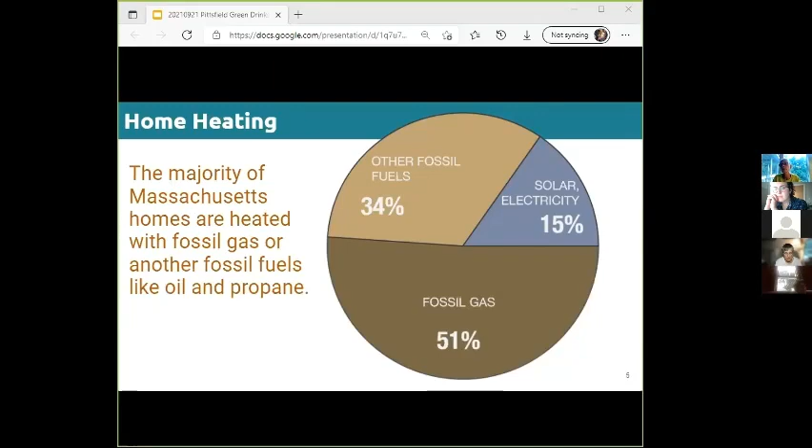But when we look at heating our buildings, we can see that over 80% of our buildings are heated with fossil gas or some other fossil fuel like oil and propane. Electricity and solar together only account for a little over 15%. So that's a lot of leaking methane and carbon emissions coming out of our stoves and furnaces. So to me, our climate goals really need a different heating solution. But our solution needs to scale, right?

There are over 1.7 million gas customers in Massachusetts. 1.3 million of them are residential. So we have to really think big about our solutions. The utilities are proposing to keep the existing gas infrastructure in the ground and start piping hydrogen to buildings. They want to start mixing a little bit in, blending it, maybe up to 20%, and then jump up to 100%.

And, you know, that's because the gas utilities know they're on the hook to make things greener. Some of you may have seen the Eversource slides that were leaked in the Globe and in EE News. This is what they're saying: they're in the fight of their life. Other slides were urging people to contact legislators in favor of fossil fuels, and they warned about the anti-gas pressure.

Another slide suggested that people should play on the fears of power outages in the public, which for me is a little bit humorous because the two biggest gas providers, Eversource and National Grid, are also electricity providers. So it seems an interesting approach, but this is their idea. This is Eversource, another leaked slide, and they're just calling it cleaner gas.

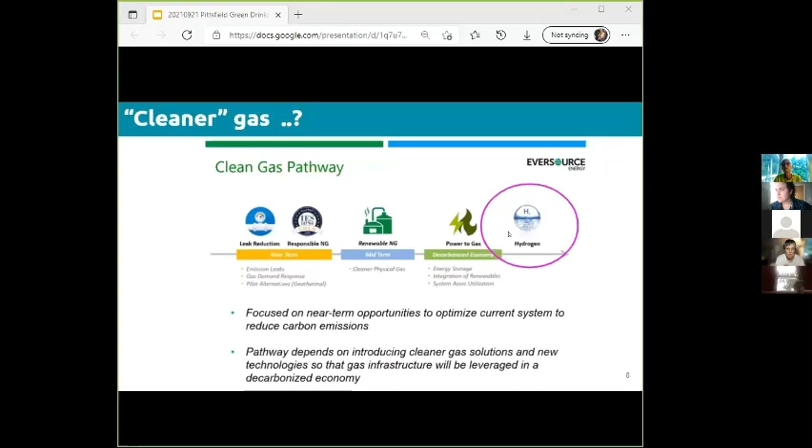So before I get too far, what the heck is hydrogen? If we go out at night and look up, there it is. It's the most common element. It's what the stars are made of. It's the H in H2O, water, but it's also the H of CH4, methane. It's the lightest element, which means it moves around really easily. It's a very, very small molecule with low viscosity, which means it's prone to leakage.

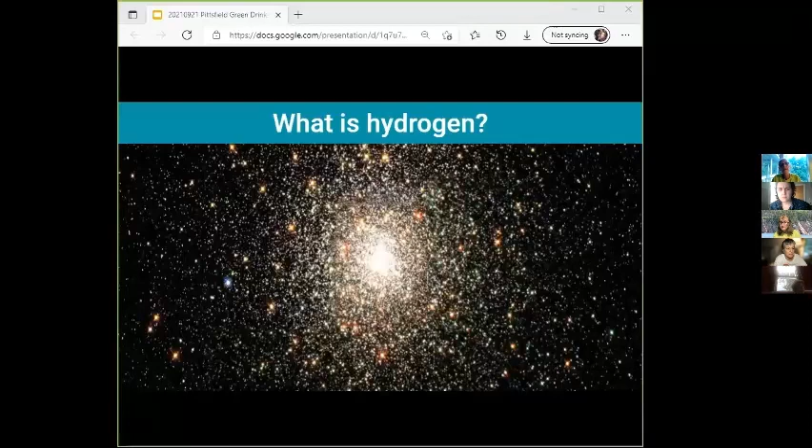So if you think about pipes and leaking, its flammability range is pretty high. About 30% hydrogen to air ratio, just a little spark and boom. I resisted the temptation to put the Hindenburg in a slide, but that's hydrogen. It reacts with almost all other elements. So even though it's the most common element, it doesn't exist by itself. So if we want hydrogen for fuel, we have to make it. The United States makes about 1/7 of the world's supply. That's 11 million tons.

So what can it be used for? Over half of the hydrogen that the US makes now is used in petroleum refineries. Most of the food that people eat is made with a hydrogen fertilizer. We know that it's used in food processing because everyone learned about hydrogenated oil. And most famously, everybody will know that it is rocket fuel. So this is already a very large hydrogen industry in the US. There are kind of 4 ways that hydrogen can bring us to a clean energy future.

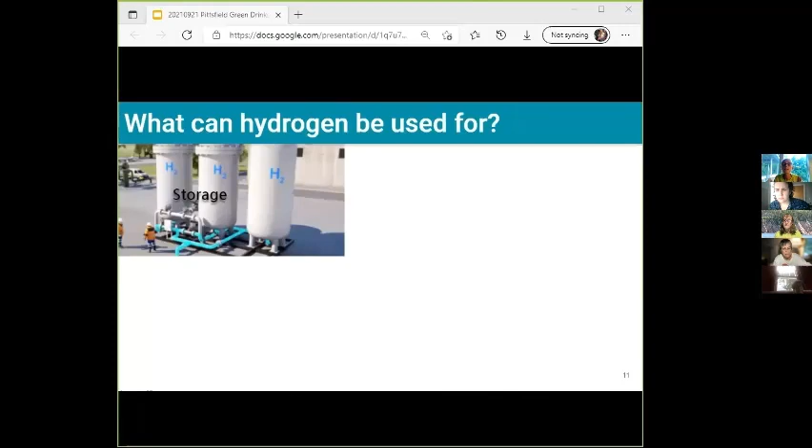We know that renewables are intermittent. So sometimes there's too much energy being created by turbines or solar. Converting it into hydrogen to use for electricity later, you can store it for about 8 or 10 hours to smooth out the intermittency. For long distance transportation, whether it's shipping or big trucking, hydrogen fuel cells are a better solution than a lot of lithium batteries, which are a tremendous amount of weight and a lot of swapping.

I think Jane, Lynn, and I all drive Bolts, and the charging infrastructure in the United States, whether it gets there or not, long distance transportation is going to be something that we want to look at hydrogen fuel cells for. And also there are industrial processes like cement and steel and glass making that need a really high heat fuel. So instead of burning fossil fuels for them, we can substitute hydrogen as a way to clean up the process.

I think I saw recently green steel come out of Sweden. As a Kristofferson, I would have to mention a Swedish thing that's good, and that will be it.

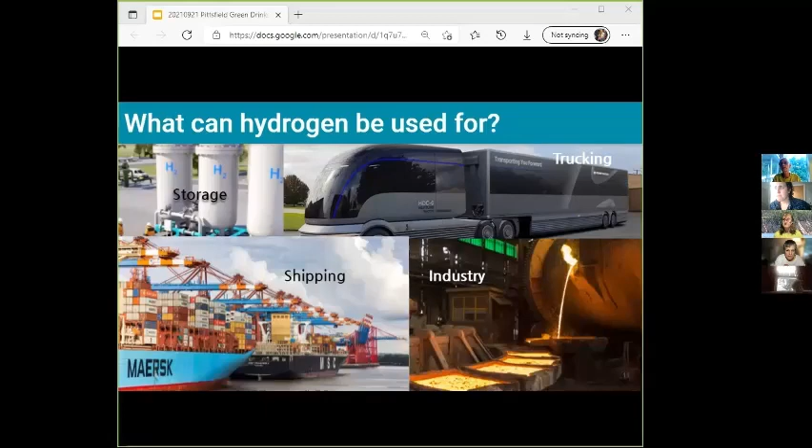So I think, with the limited amount of clean green hydrogen that we have, we need to use it for what we've been calling the last mile. Don't use it for the low-hanging fruit of heating our buildings. Because right now, 98.5% of hydrogen is made from fossil fuels. Only 1.5% of hydrogen worldwide is made from solar and wind.

Steam methane reformation, which I will describe later, SMR, is probably what you're going to hear about for hydrogen. And mainly that is good old fracked gas, leaking all the way from the fracking field to the plant where they'll make it, and then emitting CO2 as it goes.

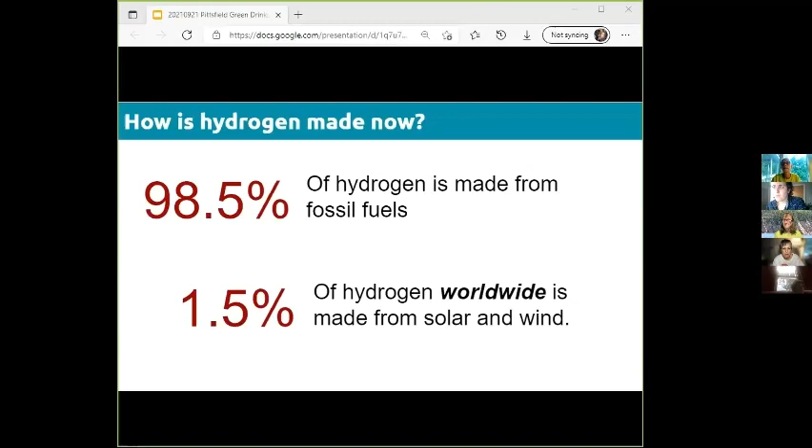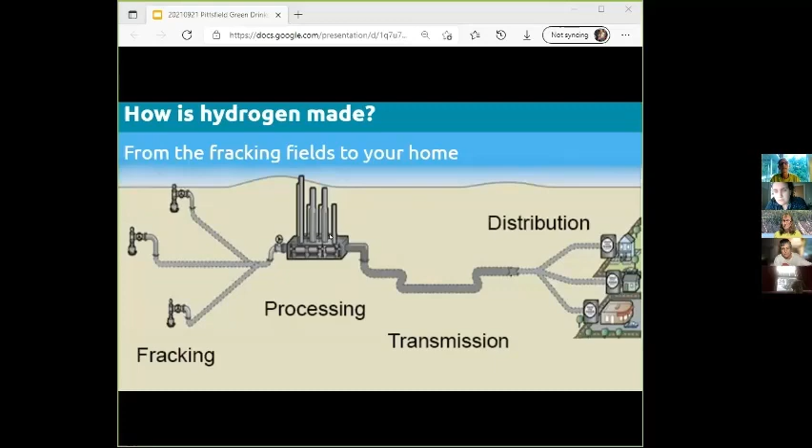So here's a little chemistry that we all learned so long ago in school. This is the process for making hydrogen from fossil fuels, and it happens after the methane is refined, right? So this is what I was saying is called steam methane reformation, or reforming the methane molecules. So when you make hydrogen from fossil gas or methane as the feedstock, you heat up water to a very high temperature to make the steam.

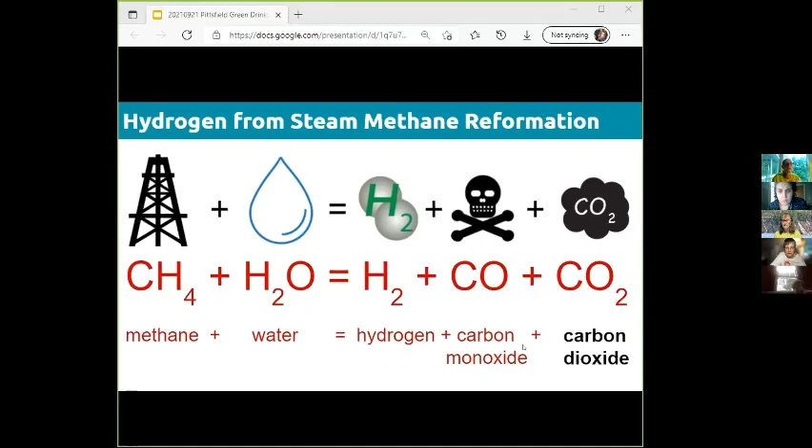And guess what you use to make the steam? More fracked gas, right? So more methane. The steam reacts with the methane, and the molecules split up, and you end up with hydrogen, carbon dioxide mainly, and a little bit of carbon monoxide for the O's that didn't get enough to be two. So if we look at the process a little more closely, we can see that the methane is going in. Remember, gas pipes leak all the way at every juncture.

Next, we have a whole lot of fresh water going in. And that can be a problem in parts of the country and across the globe, right? If this is the global solution for energy. I was listening to one webinar on this. It was a European presentation, but someone said, well, there's no clean water here and here and here. And they're like, well, just build a desalination plant. So I'm like, oh, okay, that's a solution. We'll just get the water from the ocean because that'll just work.

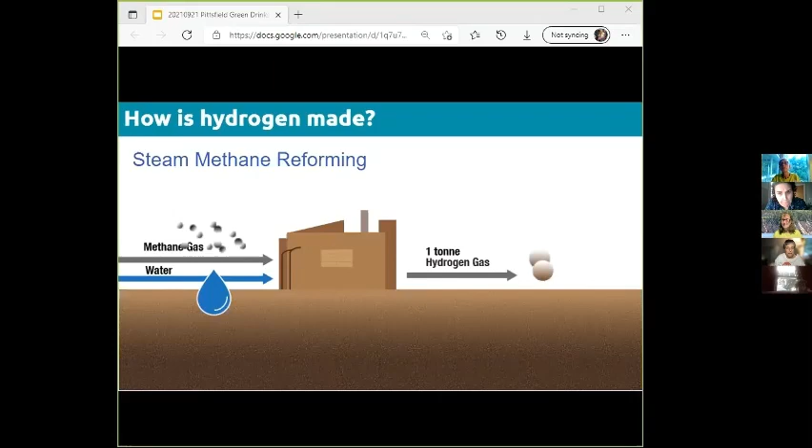Right, and then you get your output. You got your 1 ton of hydrogen. But look, you got 1.1 to 4.4 tons of carbon pollution to make your 1 ton of hydrogen. And that's our old friend carbon dioxide, right? Rising right up into the atmosphere. It really makes us wonder how they say hydrogen is so clean and green.

Well, they do, and the reason they do is they start talking about capturing that carbon dioxide and burying it underground, right? And that's good in theory, maybe. It's a process that is not currently happening. It's also a very expensive process because you do nothing but bury it underground. It doesn't come out for use. Currently, the carbon capture that's going on in the US, the carbon is used for actually extracting oil. So they do capture it, but they immediately use it and then up it goes, right?

It's not stored. And the other thing about this untested technology is nobody knows how long it will stay underground, right? It's going to leak. It's light and it's going to come up. We pipeline people, as they call us, we've seen so much go on underground with frack outs and whatnot. There's gaps in the earth. It's not like there's some cement cover. And whatever you put in there, it does tend to leak out slowly.

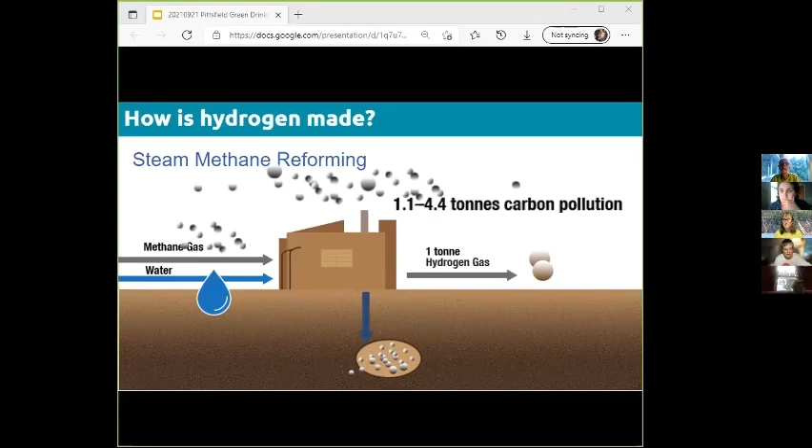There was a really great study in mid-August from Professor Howarth and Jacobson from Cornell and Stanford. They did the first peer-reviewed study of blue hydrogen. And they found that blue hydrogen is significantly higher emissions than just burning the natural gas, or coal for heat. And the life cycle greenhouse gas emissions of blue hydrogen were only marginally better than gray hydrogen. So all of that talk of carbon sequestration is the answer. And I remember that one presentation, the guy's going, it's zero carbon. It's not.

I'll give Jane the links to all of this. The study is really easy to read for most folks, right? They did that intentionally because a big scientific thing that nobody can understand is not useful for all of us. Both of them have done webinars recently. Mr. Howarth presented to Congress on the problems of this, and Mr. Jacobson did a great presentation. They're both short, really easy to understand, and I'll send that along.

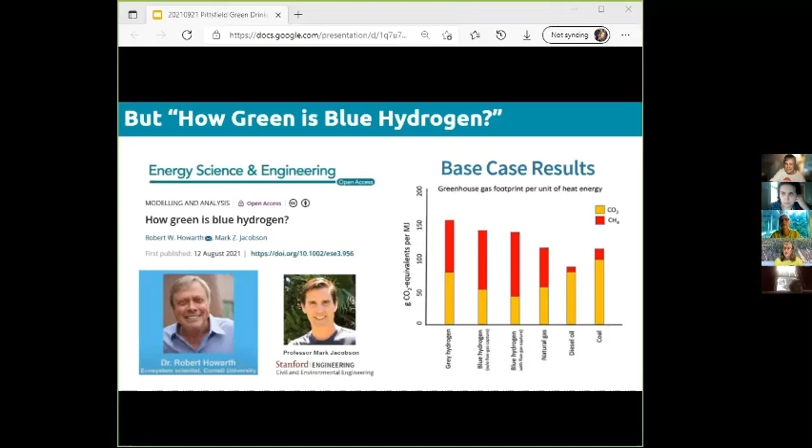Great. And thanks, that is actually in two more slides, because I wanted to put a warning for us pipeline folks that carbon capture and sequestration requires more pipelines, right? And they leak too, and they are not small. I would urge everyone to read this article in the Huffington Post about a CO2 pipeline that ruptured in Mississippi, sickening dozens of people with this green fog that it took ages for people to figure out what it was. It's carbon dioxide poisoning. Isn't that why we have CO things in our homes back when we had gas furnaces?

And these are not small pipelines. These are 48-inch pipelines, sort of make the 36-inch pipe that went into Sandisfield look small. This is the proposed network of shipping the carbon dioxide around to be sequestered somewhere. I saw in this map here, the gray areas seem to be the places in the United States that have underground cavern areas that would be, quote, good for storing carbon. So selfishly, we could be happy that we don't see one under Massachusetts or anywhere in the Northeast. But that means if we're processing blue hydrogen up here, we have to ship that stuff somewhere.

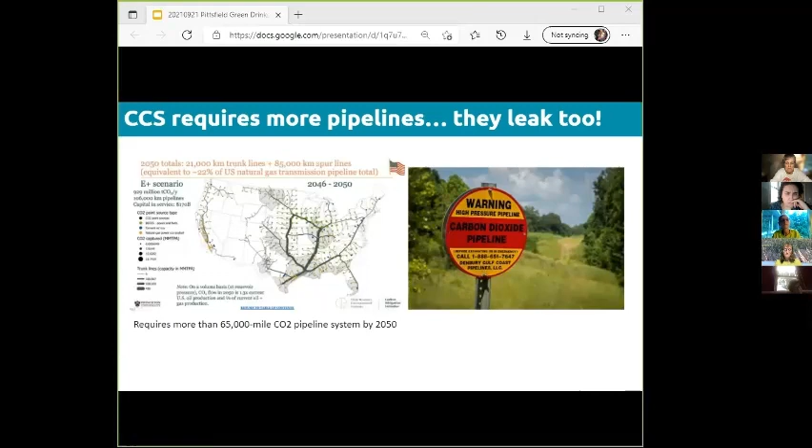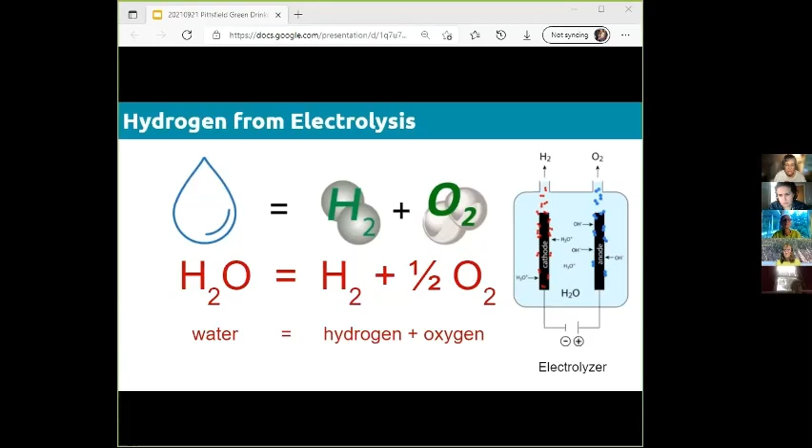So the one question I have is, where's all that fresh water coming from? Over and over, we find the fossil fuel industry is just coming for our water. We have historic droughts everywhere. It's really sad to imagine that our clean water will go from being shot into rocks to push more gas out to also being used to create the hydrogen, right? And so we have the water and the electricity going into the electrolyzer. I think people from grade school might remember the potato battery. Well, the electrolyzer is the potato, right?

Hydrogen made this way, like I was saying, is good for some purposes, especially if the electricity was going to, quote, go to waste. So say it's in the middle of the night and the wind turbines out there off Nantucket are madly spinning around. Making electricity from that is a good thing, right? It may lose 30% in its efficiency, but it was electricity that was going to, quote, go to waste. But you can make electricity, make it into hydrogen, store it, and then turn it back into electricity and run everyone's air conditioner when we all get up and are overheated from our burning globe.

There are plans to make hydrogen this way. Electric companies, as we know, right, they have to start making a tremendous amount of green energy to meet mandated levels in the RPS in our nice new next gen climate law. What we don't want is them building a whole lot more peaker plants. So hydrogen stored this way can be part of green electric generation. But one thing that we have to watch out for is that, right, the majority of the electricity on the grid is currently predominantly made from methane, right?

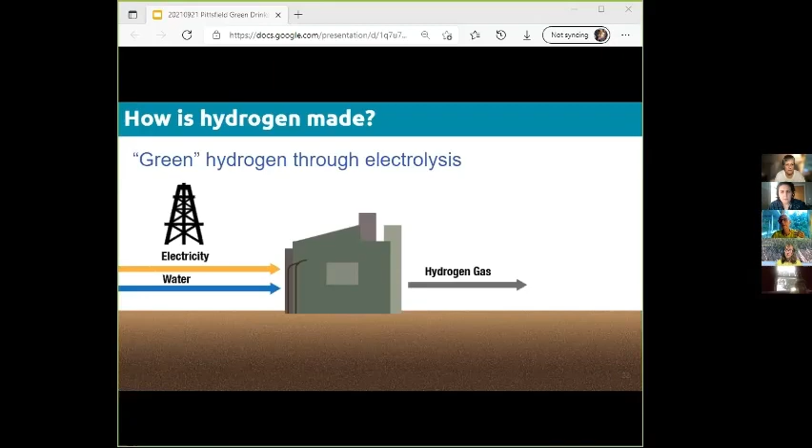So using electrolyzers that are directly connected to the green energy generation, say an electrolyzer out there in Salem connected to turbines, or I should say Somerset to keep Pat Haddad happy. So it would come right in there. And that you would know is truly green hydrogen. Store it, put it on the grid, and this is a good use of green. But if not, right, we're just right back to more fracking, and it's not the solutions that we're looking for.

So here is some of our rainbow, right? And the companies that are selling hydrogen have this clever tactic of getting everyone confused about colors. I myself had to learn that pink hydrogen is hydrogen that comes from nuclear, because in a few slides I'll talk about the infrastructure bill. And in the infrastructure bill, they have both nuclear and coal.

So the cost of hydrogen is somewhat best understood comparing it with other forms of energy. So if we suppose that we have 100 units of energy and we take that 100 units and make hydrogen, transport it, leak some of it, and use it to run the hydrogen boiler, we get about 46 units out of our 100 units. The efficiency is pretty poor.

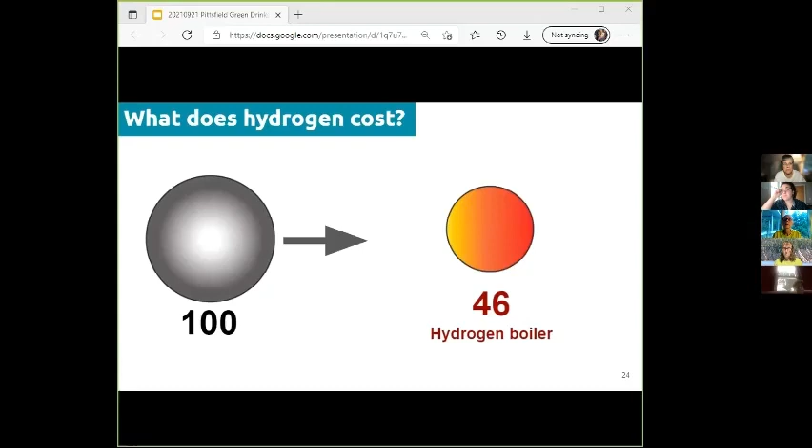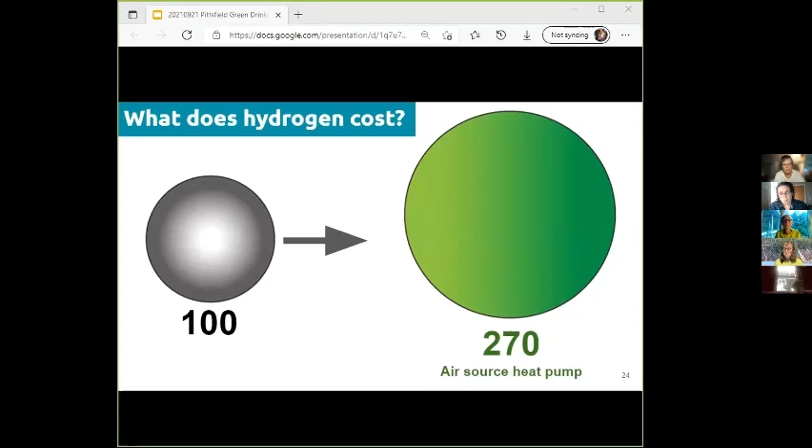Or next you could use those hundred units to directly run an air source heat pump. Even with the power line losses, you get 270 units of work out of it. You get more than you put in. So look at the comparison of burning hydrogen instead of just using the electricity, especially in something that's very efficient, like our heat pumps, the mini splits.

The other cost that we're going to see is the people who own homes and buildings are going to start looking at these numbers, and they're going to transition to electrification. That means that people who don't own their home or their buildings, who are low income or live in EJ, they're going to be paying much more on their bills, because as we know, so many of the charges, the infrastructure charges, are socialized across the ratepayer base.

And as the ratepayer base shrinks, everybody has to pay a bit more. And so the folks who can least afford it are going to be paying for the infrastructure changes that are going to be required to run hydrogen into our homes. So what else are we going to have to pay for?

So we need 30% more methane, because as you saw, to make it, you need more steam, you need it as a feedstock, and then you need more of it to heat the water to create the steam to do the reforming. We need people and their shiny new equipment, so we're going to have to buy all of that. We need new pipes and pipelines, because hydrogen causes steel pipes to embrittle and crack and cause leaks.

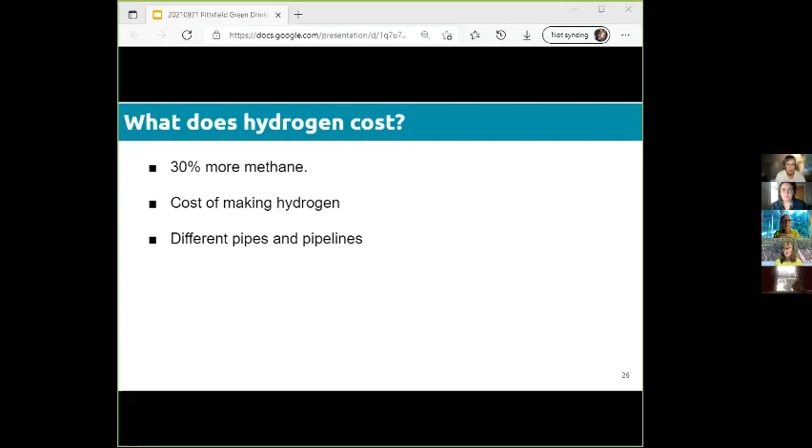They also need to be of a material that contains that super tiny molecule that moves. The other cute thing for some of us is that compressors will need to be 3 times larger to push hydrogen around. Everyone will have to replace all of their appliances, because nobody certifies equipment for hydrogen in the US or Canada, so in North America. On an efficiency basis, you have to burn 6 times more hydrogen to get the same energy result that we did from electricity.

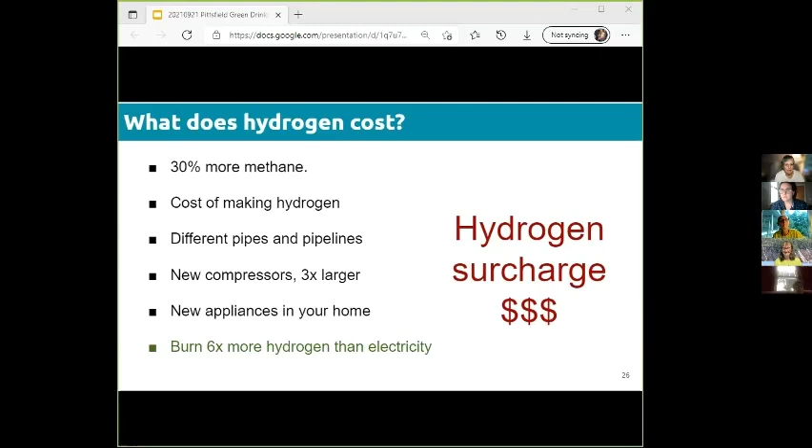The group that I've been in talking about this, they're calling it the hydrogen surcharge. I think us pipeline people, we might call it a hydrogen tax, right? Kind of like our pipeline tax, it's a hydrogen tax. But so that might lead us to wonder, well, is hydrogen safe, right?

We know if we start from the baseline, since June, there have been 3 homes that have blown up in Massachusetts due to gas leaks, right? The 60-year-old man that just died in Maynard because the service line from the street leaked into the crawl space under his home and it exploded. The utilities don't keep data on these events.

There's no mercaptan solution for hydrogen yet to add an odorant or a colorant or anything that will let you know it's there. When it burns, it doesn't give off much heat, so you can't feel it. But since hydrogen is lighter than air, the fire immediately expands upward.

The green hydrogen is most often made from grid electricity, which is likely made from majority methane. So we would kind of say hydrogen does not cut emissions. So you have to ask yourself, why are we doing this and what's the point? This is the point, right? They're desperate.

So we really can't be friendly to our utilities. We need to push them. We need to be saying no to hydrogen. You can call it decarbonized gas, but it's still hydrogen, right? And so we need to start calling it what it really is, and that's fossil hydrogen, like we call it fossil gas.

The utilities are proposing to start piping 1%, moving on up to 100%. They claim they can get to quote net zero, but I keep saying we don't need net zero, man, we need 0, 0. We can decarbonize home heating through electrification, heat pumps, geo microdistricts, really deep dive energy efficiency, but not moving us to just another thing to burn.

So if we look at what our politicians are saying, here's our AG asking for the future of gas investigation, which is at the DPU now on docket 20-80. In her request for the investigation, she said, what's the potential for power to gas? Sorry for the acronym, and she did it, not me. P to G is power to gas. And can it deliver? And have the gas distribution utilities investigated the use of hydrogen? So there she's saying, hey, you're going to put hydrogen in the pipes that go under our streets?

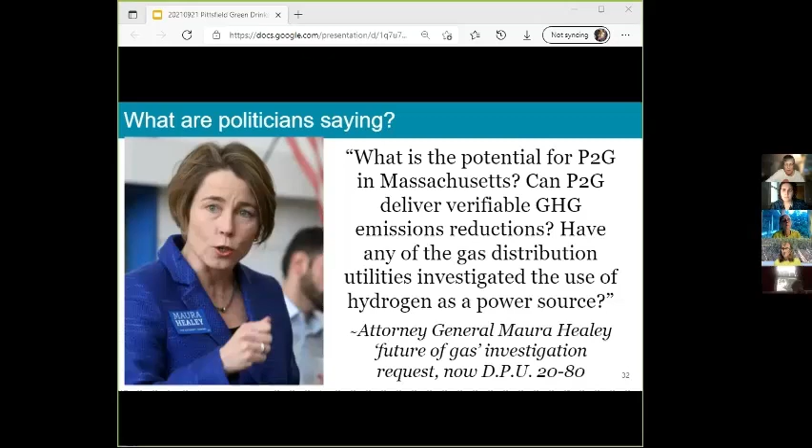But so to get back to the P to G, this is the Enbridge slide, investing in power to gas. This is the future to them. They take their electricity, they run it through an electrolyzer, they store it in a storage tank. And the words down there for number 3 are really small, so I will read it: instead of converting the hydrogen back into electricity, the hydrogen may be blended into the natural gas distribution system at a predetermined percentage to reduce the carbon content of the gas. This is keeping the pipeline systems entrenched for the foreseeable future.

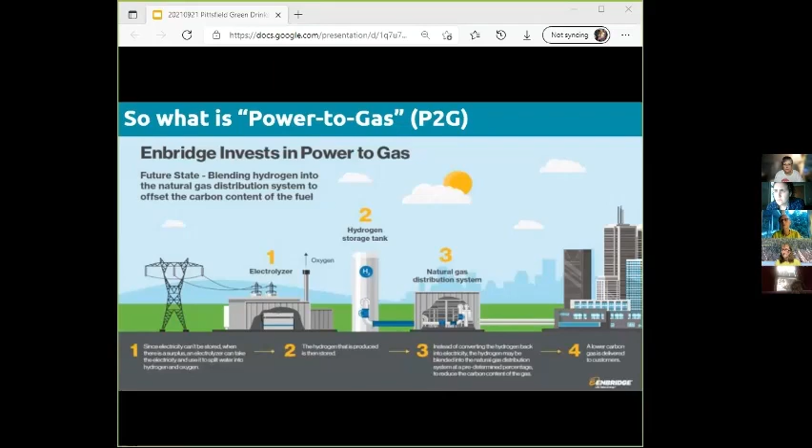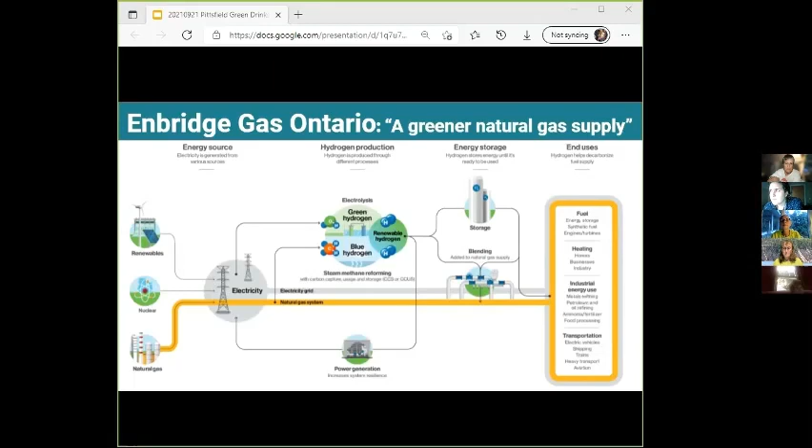And we know that that area has actual real green electricity, right? This is where Hydro-Quebec, Massachusetts and New York are all trying to get our green energy from them. But this is what they're going to use it for, to pipe into homes. It is so not what we wanted.

I'll show you this slide because this is Enbridge's sustainability, and they say, hey, look, we moved 20% of the natural gas on our interstate pipelines. So we're actively exploring how much hydrogen we can blend into the transmission system. And I can tell you that Kinder Morgan is making the same claim. They are also claiming that they can move carbon capture.

So they are looking to use their pipeline systems for all of this whole plan, right? This whole scheme of hydrogen and the pipelines, these same pipelines. One of the interesting things I read about hydrogen put into the pipelines is that it doesn't actually blend, because like I said, it doesn't stick to anything, right? So they can actually put hydrogen in the pipe in Texas, send it up to Massachusetts and pull it off and have just the hydrogen. And very curious what they're gonna do with that.

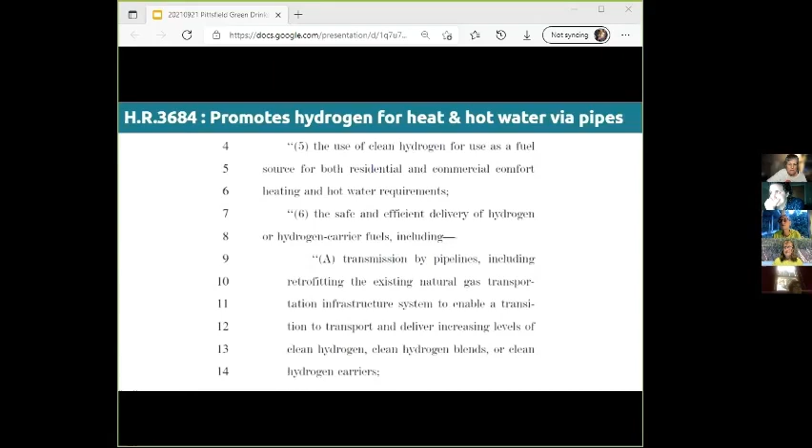And the thing that's interesting is you'll see that now they call it clean hydrogen. We've dispensed with the rainbow, and we make our own definition of clean hydrogen in the infrastructure bill. So it is something that creates a carbon intensity equal to or less than 2 kilograms of carbon dioxide equivalent, blah, blah, blah. Clean hydrogen production will come from natural gas, coal, renewable energy sources, nuclear energy, and biomass. So we have dispensed with the rainbow and just gone straight to what we wanted to do.

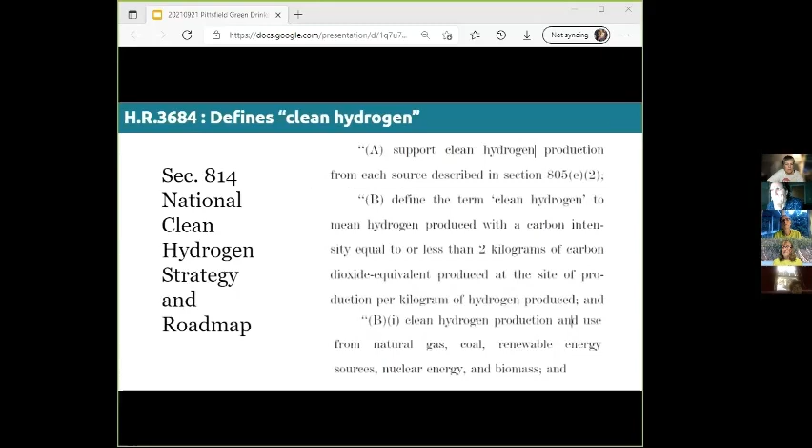The other thing that is in the infrastructure bill is $8 billion for 4 regional clean hydrogen hubs, 2 of which must come from regions of the country with the greatest natural gas resources. So this Appalachian one that is in the bill, which I am calling the Joe Manchin Hub, is here. It will establish a regional hub for making, quote, clean hydrogen from natural gas liquids, hydrogen produced from steam methane reforming of natural gas feedstocks.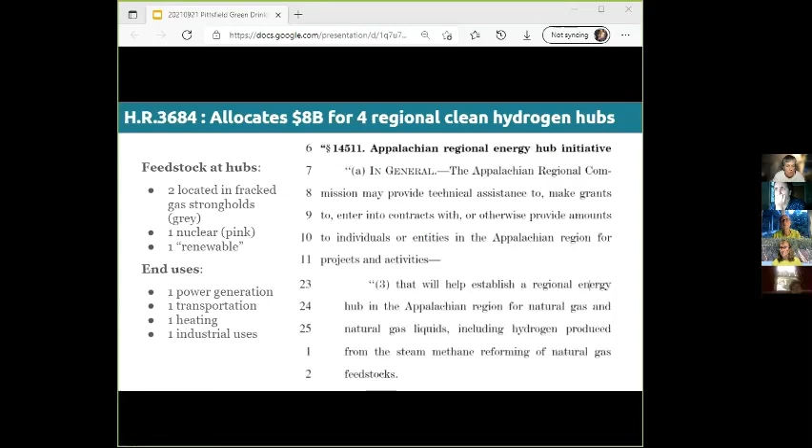The other sad thing, right? So there are 2 hubs from the fracked gas strongholds. One must be from nuclear and one can be from renewable sources. The end uses of hydrogen demonstrated at these hubs must be power generation, transportation, heating, and industrial uses. So off the bat, we're no longer using our precious resource for the things that we really need it for.

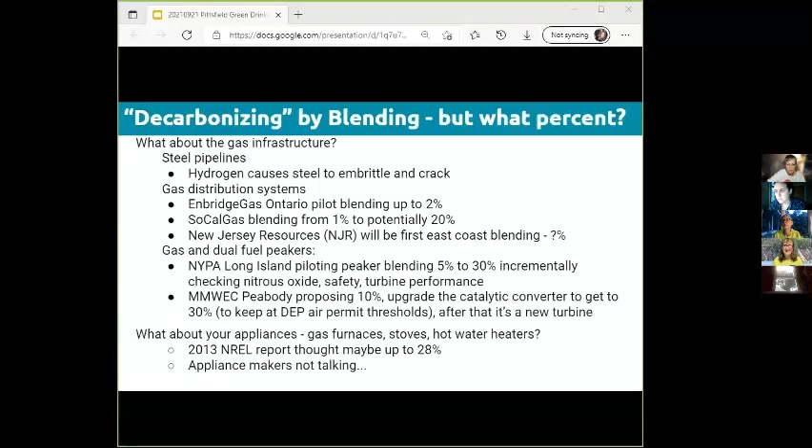Why are we going through this problem? Piped hydrogen costs more, it's inefficient, it is inequitable, it emits more greenhouse gases, it harms public health, and it's more dangerous than gas. I don't think hydrogen is what we want.

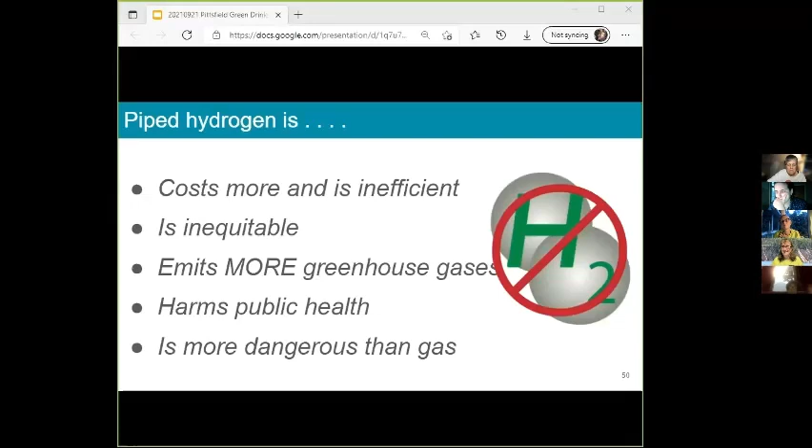Yeah, sorry. I think all of us should be talking to our legislators and pointing out to them, this would mean replacing every bloody pipeline, all the appliances. If you're going to do that, just go electric. Yeah, that was one question I put in the chat, was you can't run very much hydrogen through existing pipelines. They all need to be upgraded as well. So there's even lots of inefficiency that way.

Right, and I read that the meters at the meter stations coming off the interstate pipeline are only accurate up to 4%. So, right, and because I couldn't figure out why the interstate guys were mixing such a small amount, right? They have these huge hoses for gas. But if they can't meter what's coming off the pipe and charge properly, that's no good for them, right? That's sort of how we know.